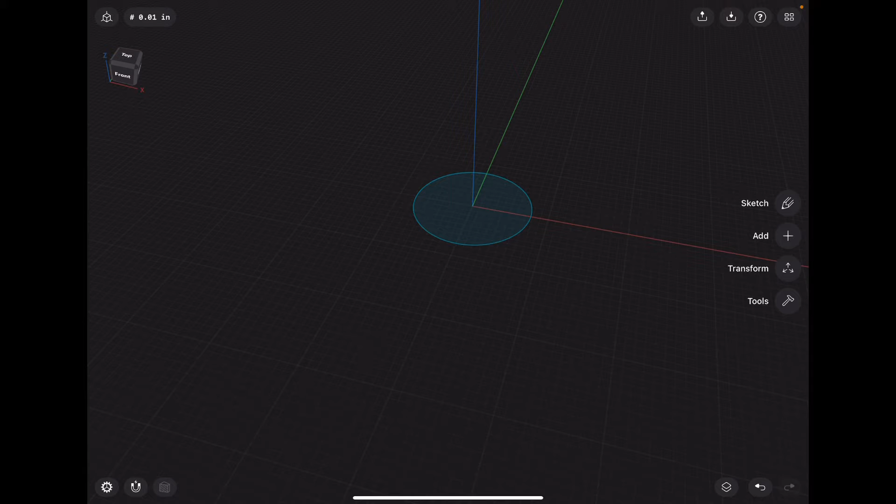If you double tap on the face of a part, as long as it's flat, it'll zoom in like this, where you can draw on the face of the part. If somebody's interested in trying to learn, this is one of the easiest softwares I've used. I've used SolidWorks and Fusion 360. This one's really fast. The only downside, you have to have an Apple Pencil to work it.

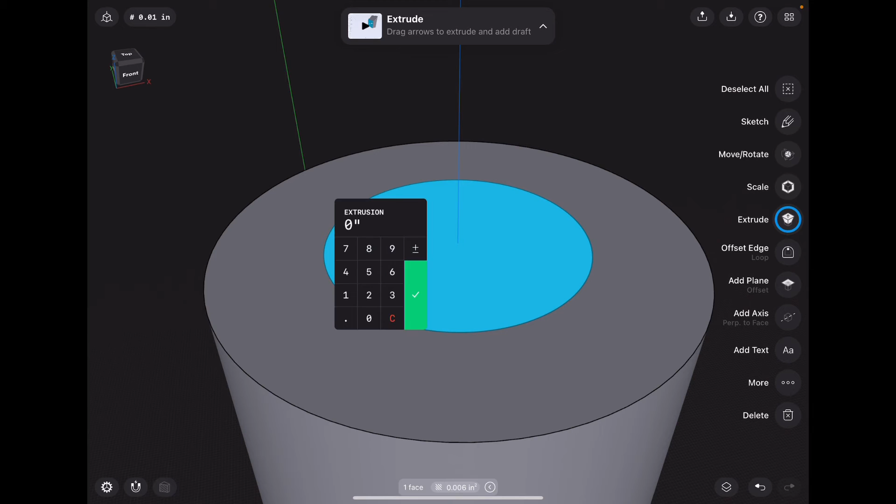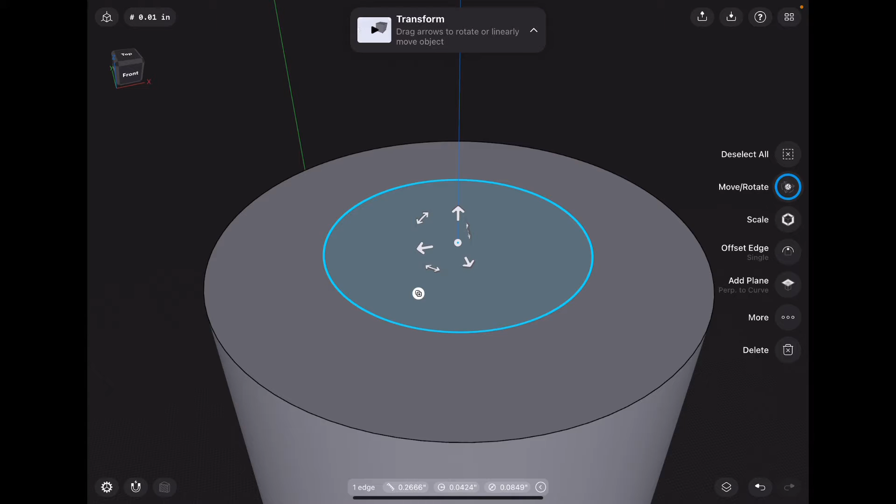If you ever draw a circle on this face and you're trying to click the outside of the circle where you just want to move this outside piece, you go to project on the drawing. You can project that line onto the surface, and then you have it already there to where you can move it instead of having to mess with how far the drawing is on the surface of the face, because you can move it back and forth to where it's directly on the face, and it'll finally realize that to where you can manipulate the inside or outside.

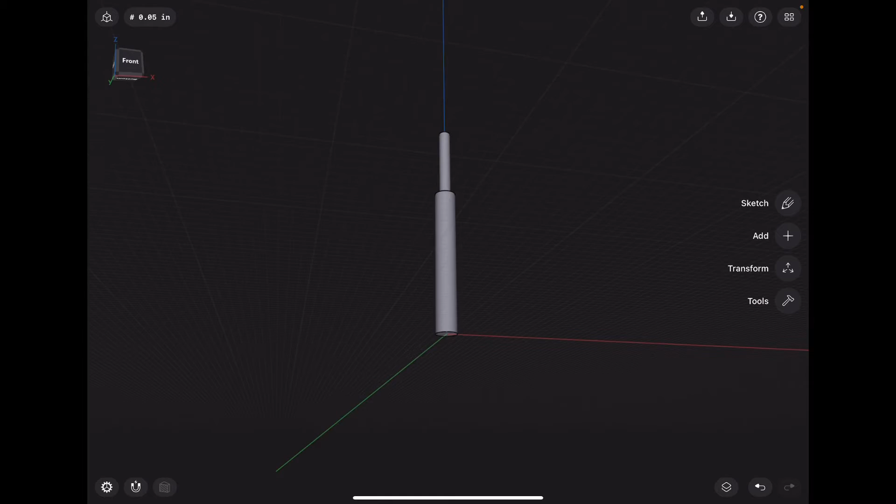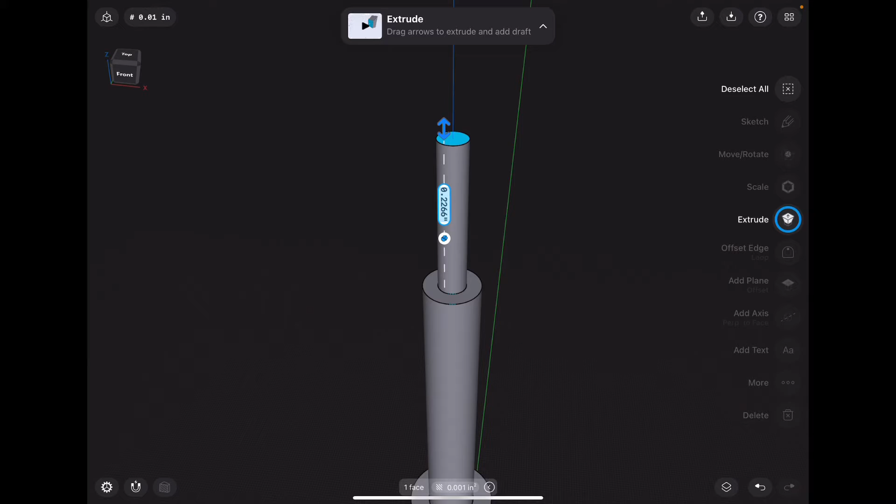Now, normally on these Beretta firing pins, I'm just going to draw this to show, they have a smaller diameter tip right here that protrudes out, I think it's about 3/8 of an inch or so, but it's super tiny. So that's the part that breaks off. The rest of this is fine.

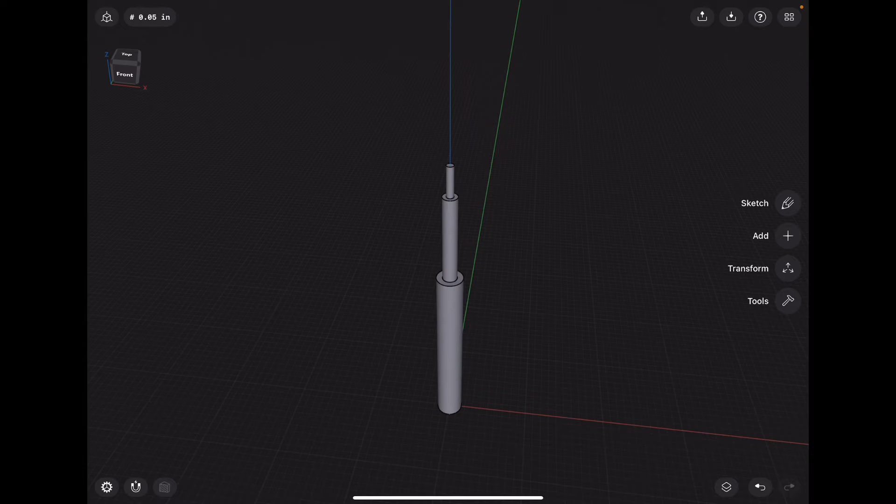But what I'm going to do is drill that hole out because it's only about 30 thousandths bigger, or I think it's like 50, 60 thousandths bigger. But anyways, it's enough to where you can make this work as a firing pin. I'm just going to grind it down to where it comes to more of a sharp point, and probably make the very tip of it blunt, where it's not so sharp, but it'll still hit the primer.

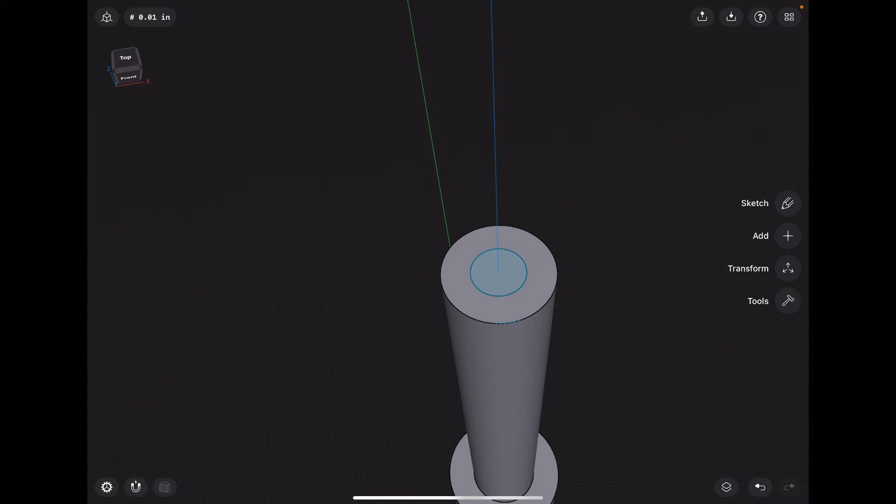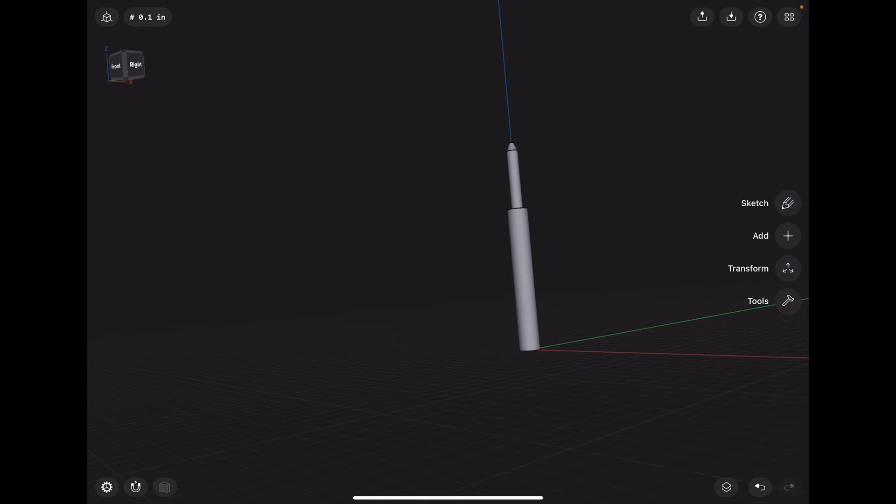Now I'm just gonna erase that and bring this to a point about like that. I'm not going to be exact on the angle because I'll just do that by eye on the lathe. That's roughly what it's going to look like. It's going to be really small. Now, the firing pin has a notch cut out in the middle, like an end mill.

It ain't gotta be exact.

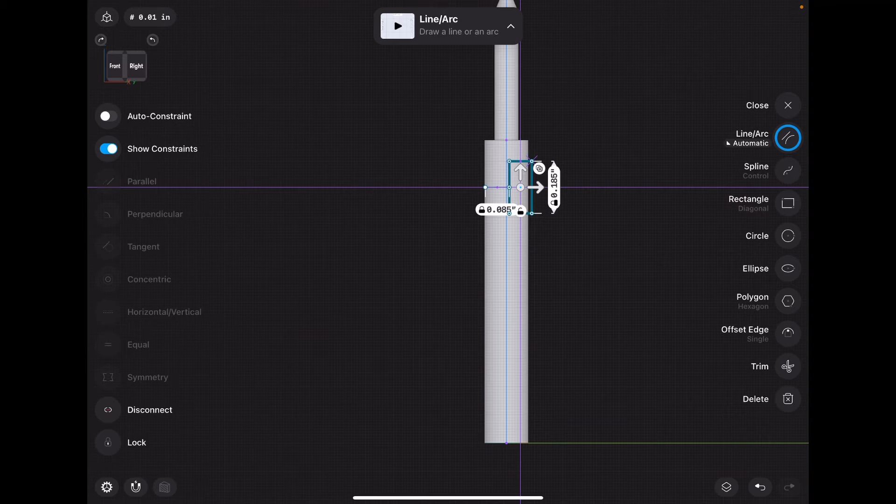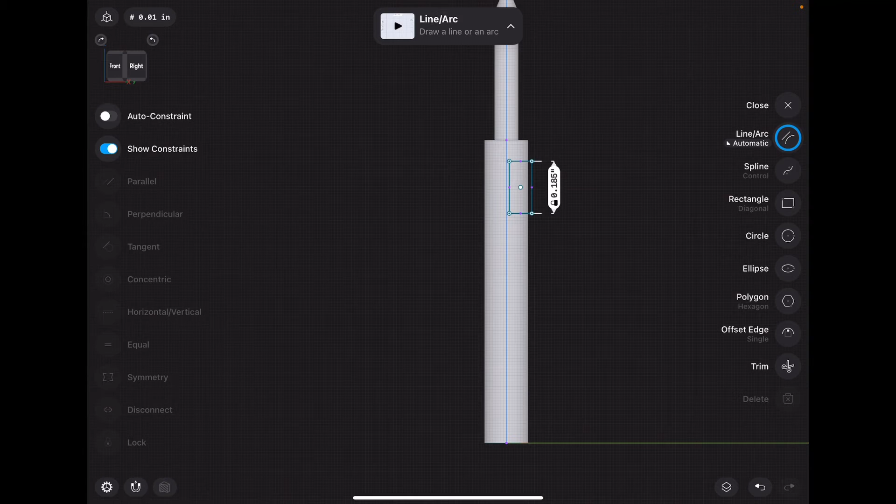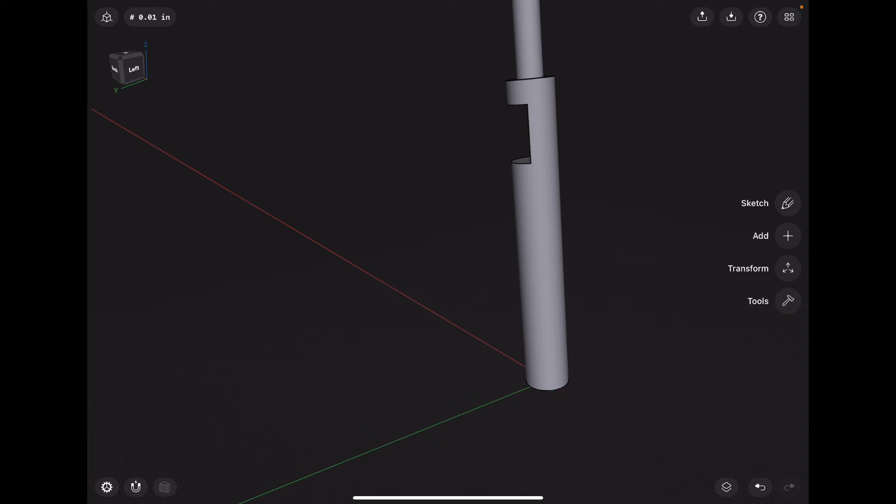But yeah, you just extrude that, and that'll be the part that's cut out with the end mill. Now, I'm probably not gonna go as deep, or I'm gonna try not to, because the deeper you go, the weaker that part of the pin will be. But I am gonna harden it, so. Around that.

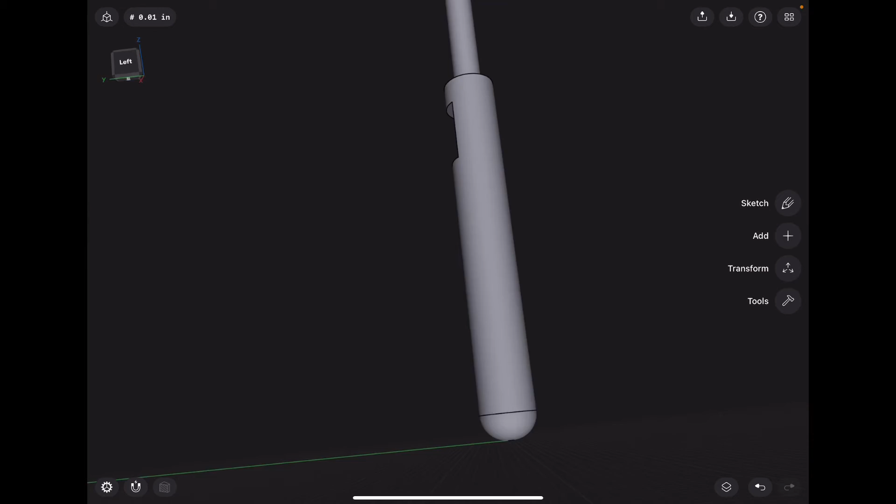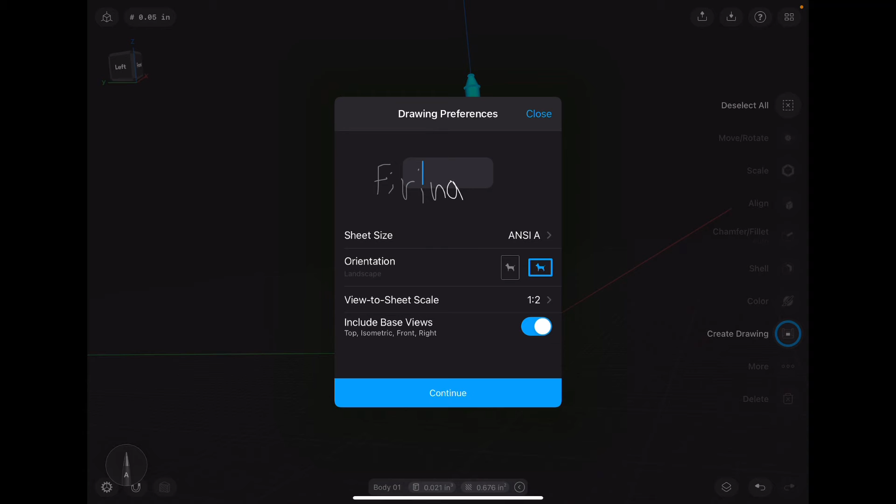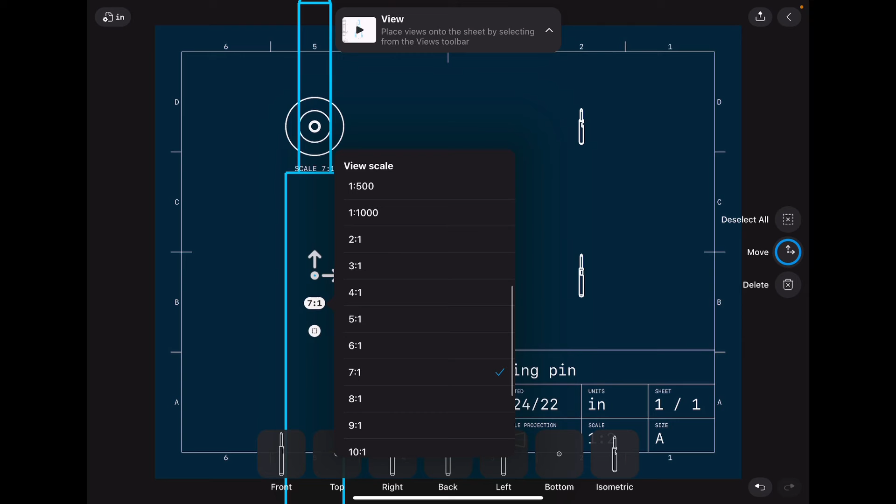Now that I got that done, all I gotta do is go create drawing. Then you can click on these and you can actually make them bigger or smaller, depending on the scale. Since that part's so small, you can go all the way up to like 7:1. Oh, wrong way. Yeah, so the diameter's so small, but this you gotta wait.

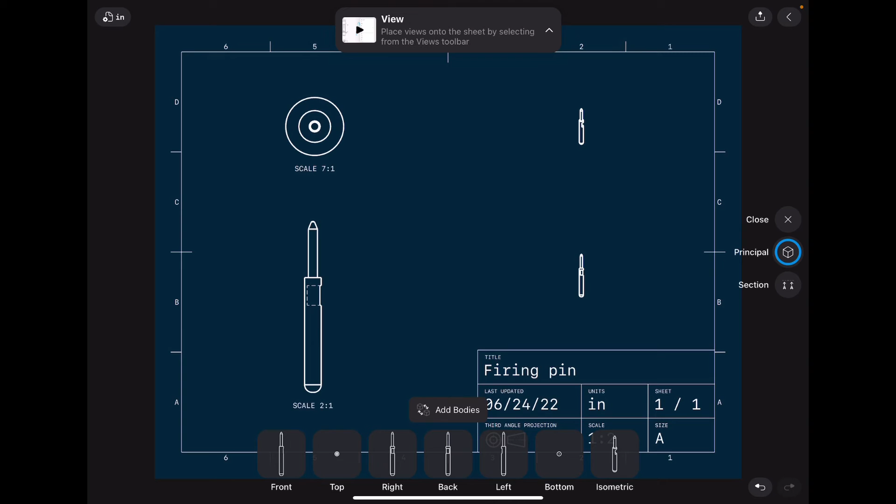And this doesn't have any cuts all the way through it, but there's a hollow mode right there. You can see where it shows. This is like the back side of it. It shows where that cut would be, because it's kind of at an angle. That dotted line. But you can also do section views on here, where if you want to cut this in half to show what something would look like if you had a bunch of cavities on the inside of it, you can also do that.

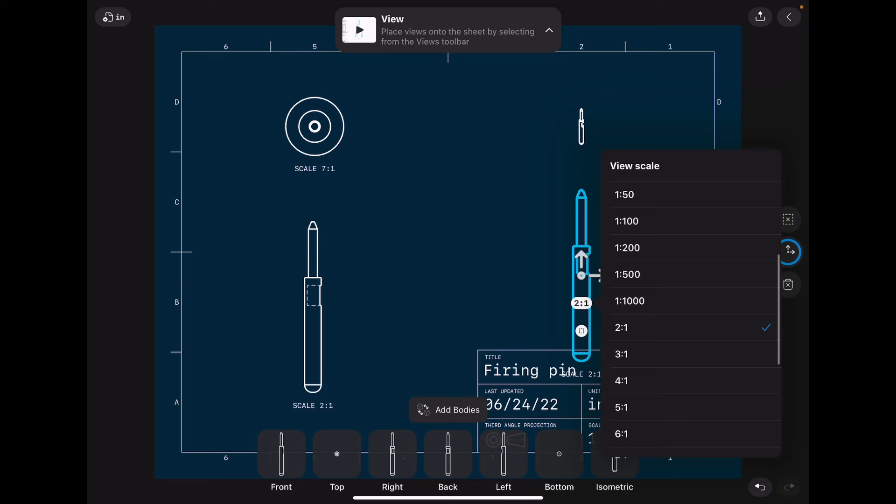Now, one thing I don't like about it is the lining up of the measurements. Most blueprints, if you have the side face or the top or the bottom, these extension lines will line up. Well, on here, there's no way to really make it look like that, because you can't manipulate the angle of it.

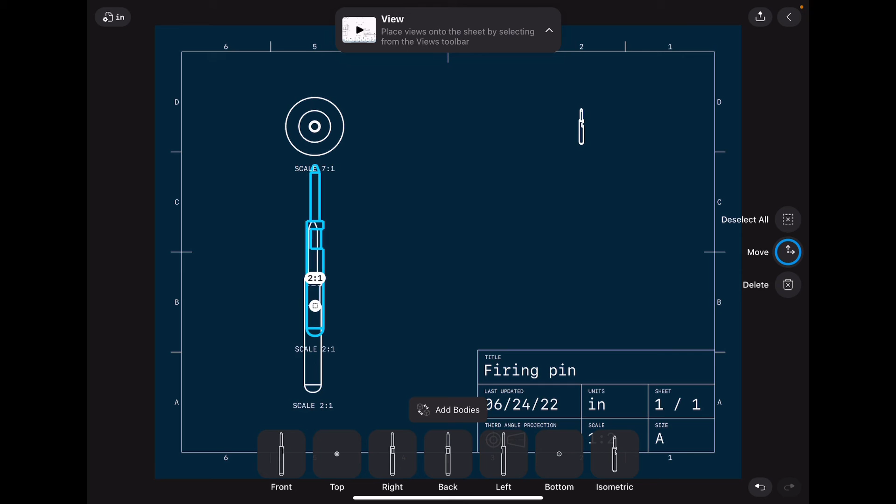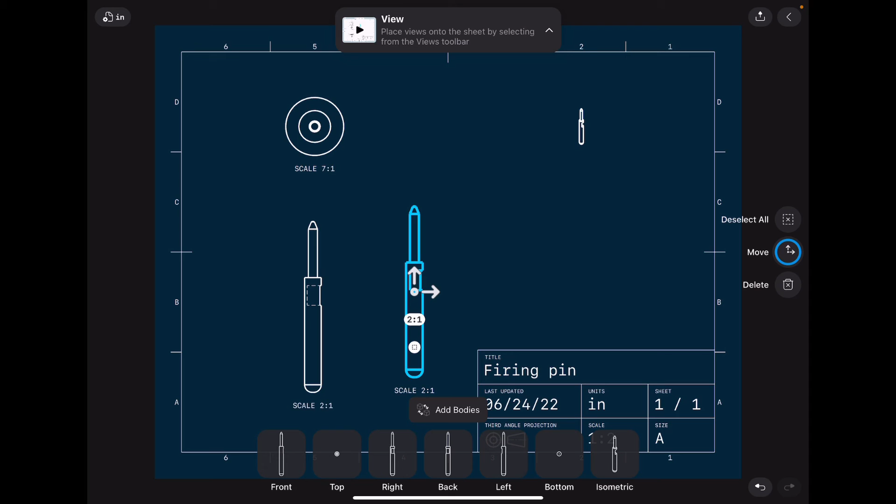So I showed my instructor this one time, and he found it confusing the way they have it laid out, because the way they teach us in blueprint class, everything is lined up. Like this point would be lined up with the center of that, and on this one it'd be a little different. But basically, if it was a block or something, it'd be the same width here and here, like this corner and the other corner over here at the top of this highlighted part would line up, like that. If it was a square part or something like that.

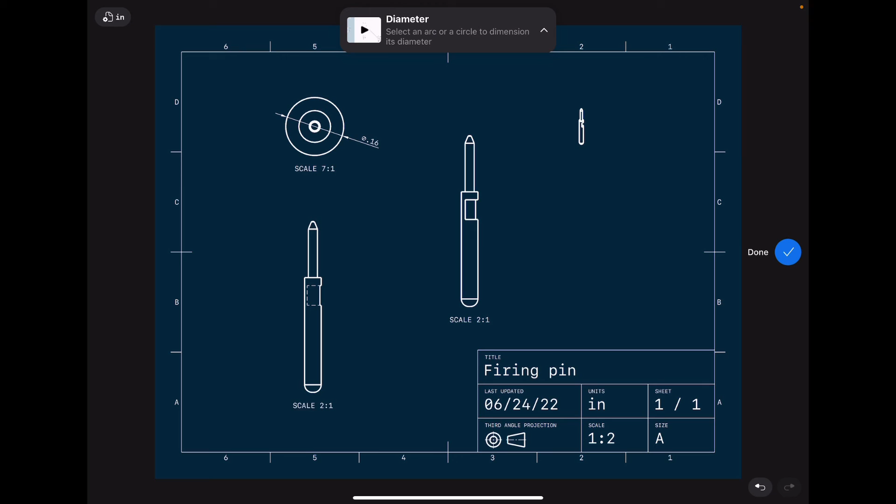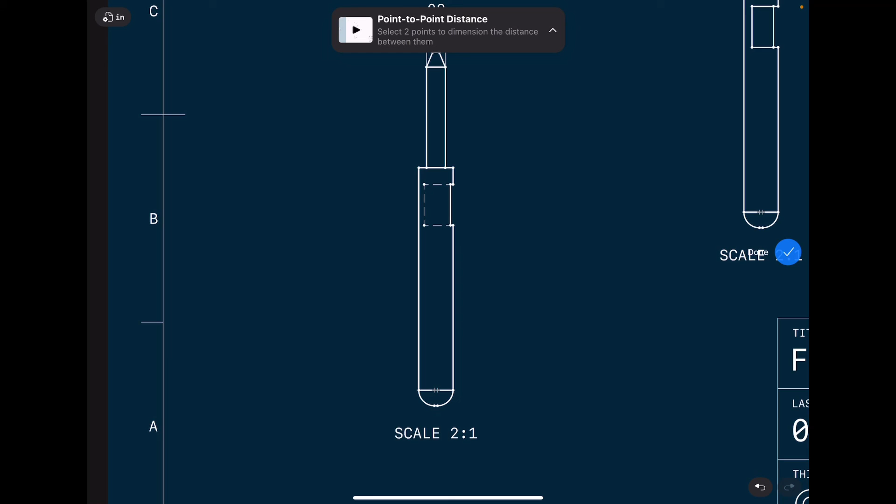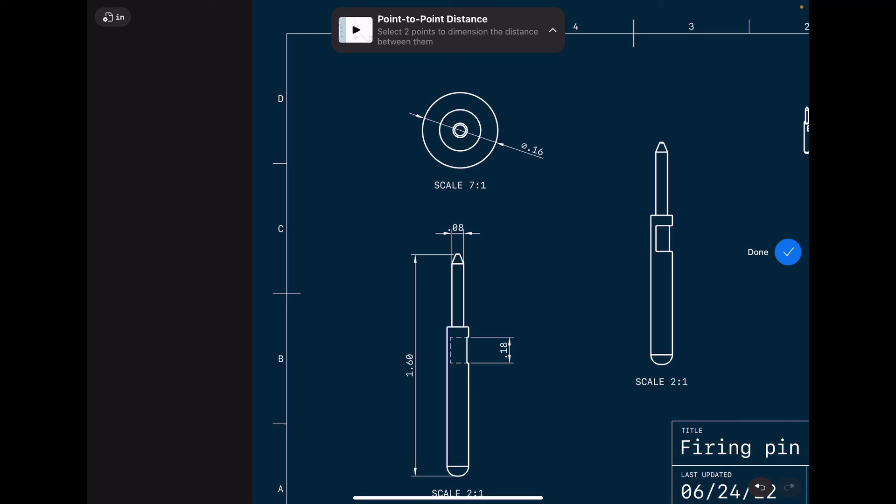Do it like this. Just add in a note for the depth of that.

I'm about to send this to my phone so I can pick it up and then start turning it down.